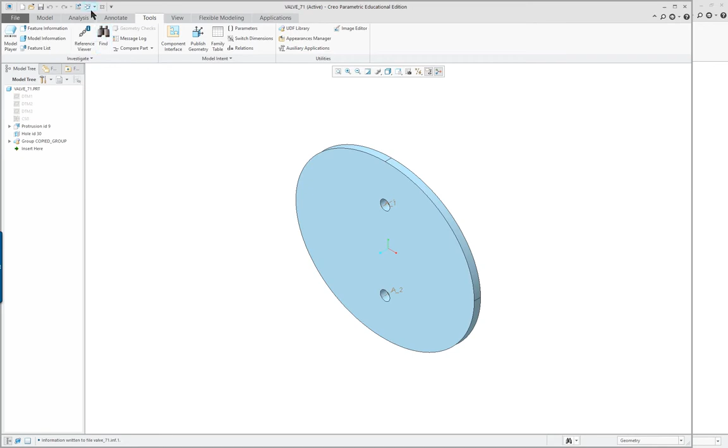One of the things we should do is at least check the units. It doesn't make any difference which of these we open. We could go over to Tools and Model Information, and it's in metric. So even though it says custom for the files, which I'm not sure why that's happening, it could just be part of the conversion process. These were created over 20 years ago.

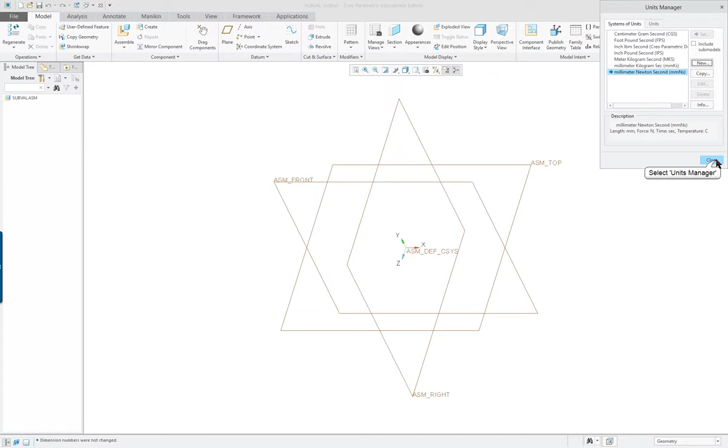So we're going to start off by selecting our units, and we're going to select change, millimeters, set, interpret, okay, and close. We have to do this when we do the assembly too. This is the sub-assembly.

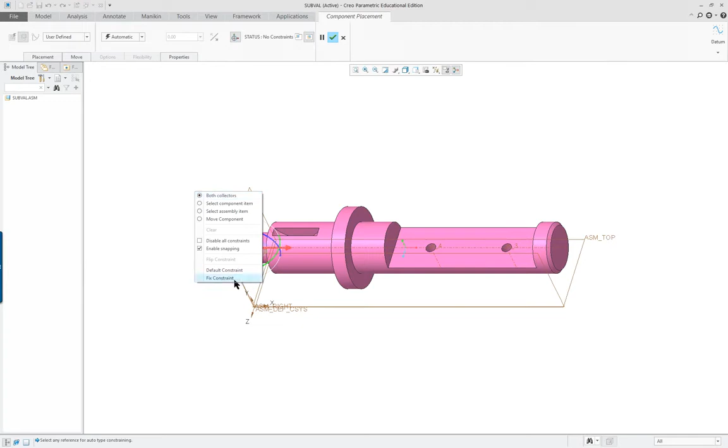So the first component to bring in would be the shaft. And the preview of the shaft is almost the same color as what I gave the shaft when I created it.

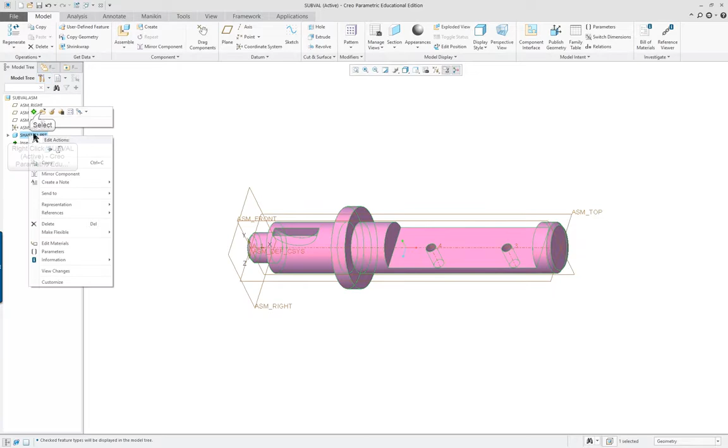So what I'd like to do first is view everything in our model tree. Let's open this up - it's always easier to do it here. View, and go into our appearances and just change the color.

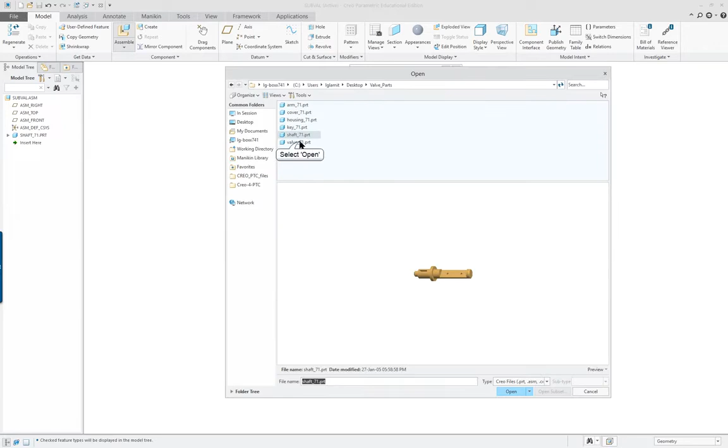Close it, and now we'll assemble our second component. The second one is the valve plate, and we're going to pick on a surface, another surface, and it's not going to be normal - we want it to be coincident.

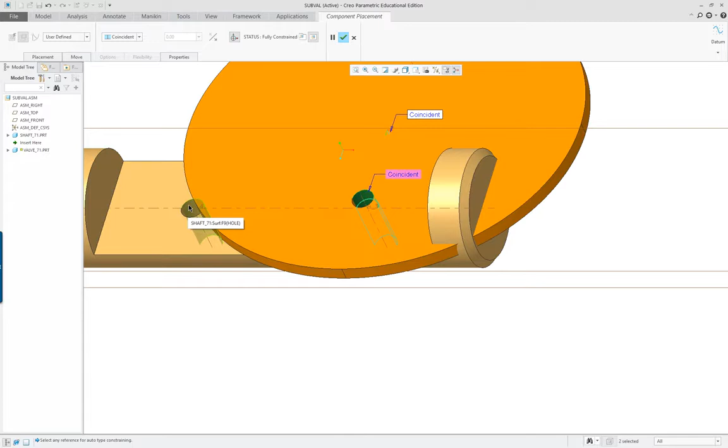And then we're going to select one of the holes, the other hole, and continue on. Right mouse button, new constraint, and select - you can select the axes too, that's a valid selection. Let's take a look at the placement, and it says it's fully constrained.

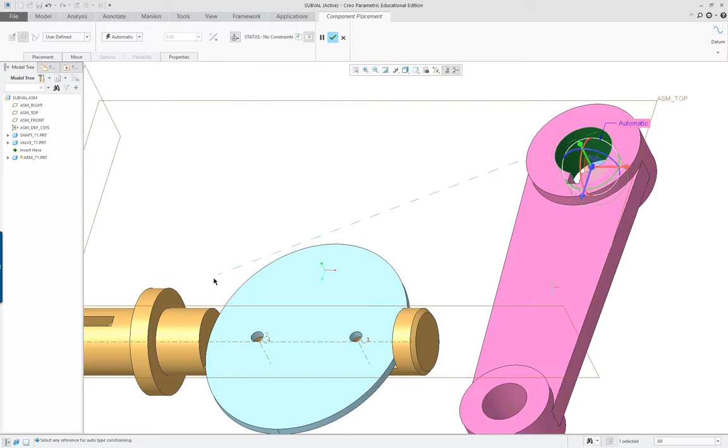All right, so the next one is going to be the arm. Assemble. We'll select the large hole here and the shaft at this end. I can drag this - I want to see it on the same side. Now my second set, I'm going to select here

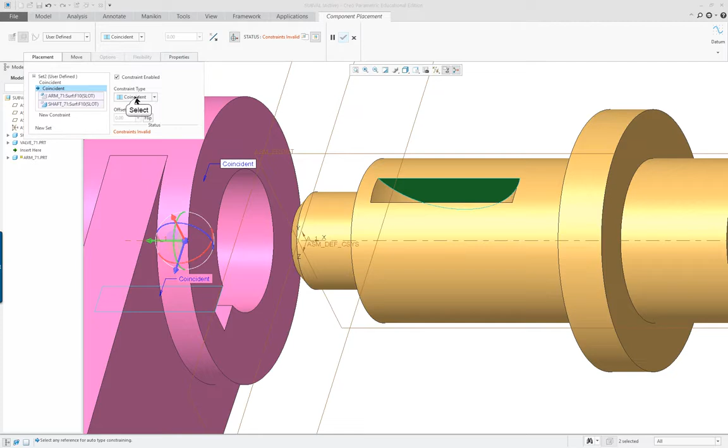on the key seat and right mouse button until I get this one, and this one says normal. So let's try coincident - it doesn't like it. Let's try parallel, and then the flip. Okay.

And the last one, we'll add one more constraint, and we'll select here and here. And we do want to make that a distance and back it off a certain amount.

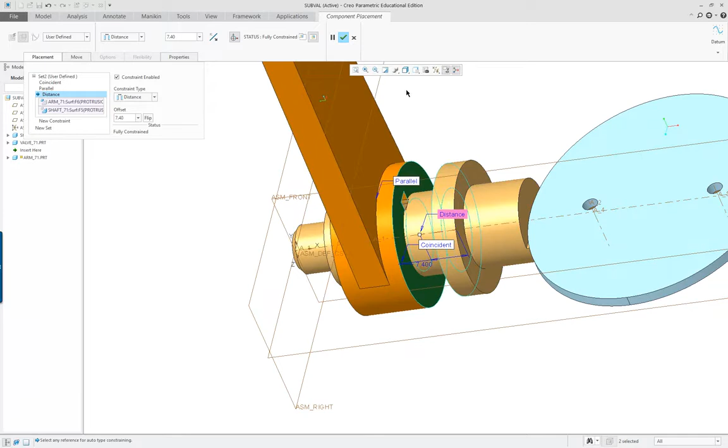Now what I'm going to do is go into my front view and hidden line, turn off the datum feature so we can see it a little bit better. And you can see the key seat here, and I'm just going to drag it a little bit so it's approximately correct.

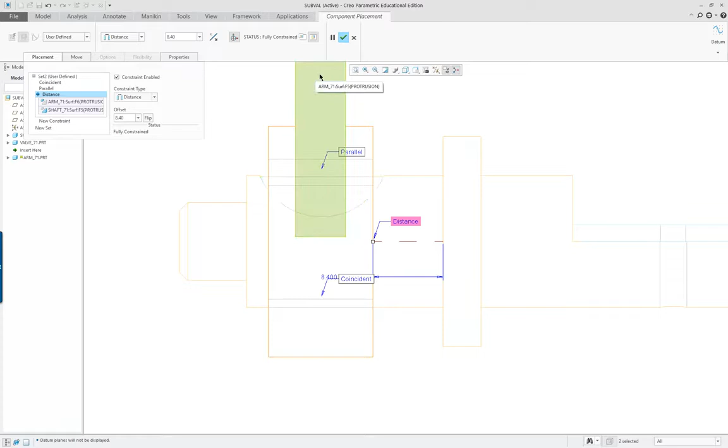Check. Standard orientation - we're going to go back over to our shading with edges so we can see everything. Okay, so the subassembly is completed.

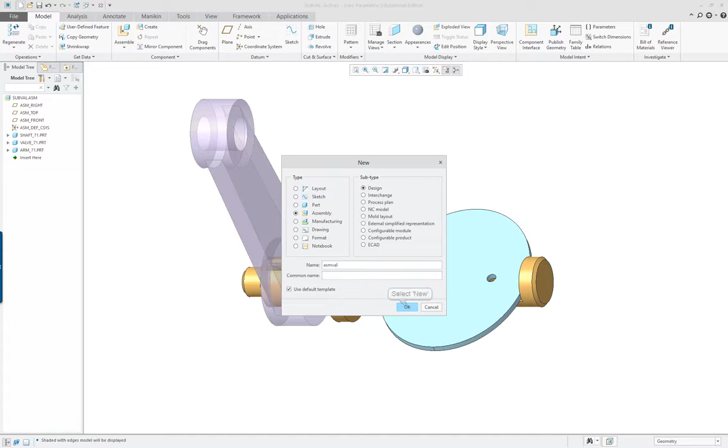So I'm going to start a new assembly, and I'm going to make sure in the very beginning I go and prepare it by having my units set correctly.

And we'll turn these all on. Again, unfortunately, you still have to go back and turn on the filters. No, they're okay. All right, good.

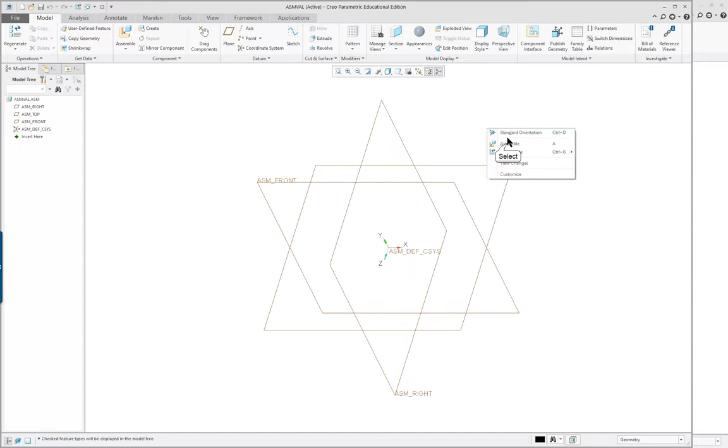All right, so we want to bring that other component in there. So assemble. It is in session. And we're going to put it at the default constraint again, like so. No, let's see, I'm doing this wrong. I'm gonna delete that one.

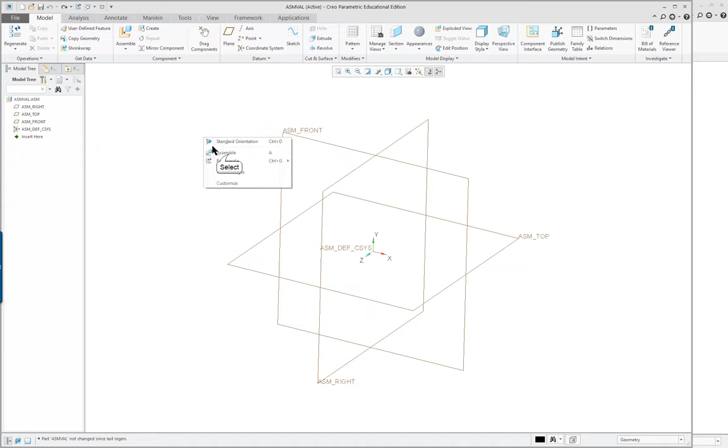We don't want to. We want to bring in our housing first. So assemble. And that one we want to have at our default, like so. And I'll shut off all of this for now.

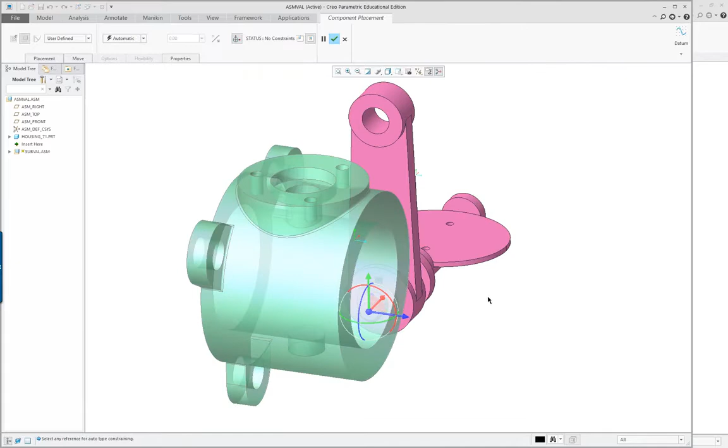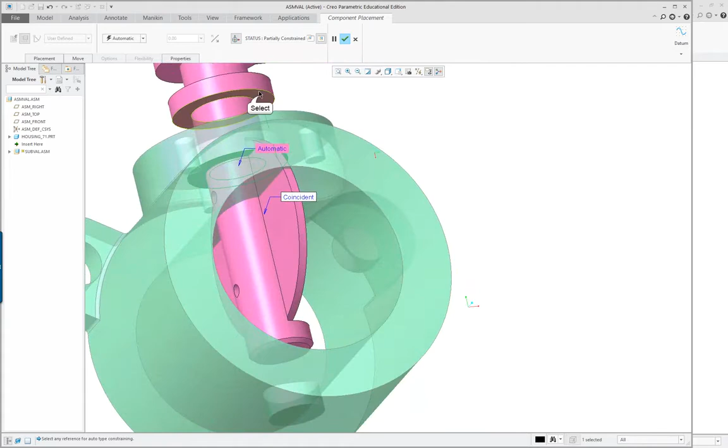Now, right mouse button, assemble. In session, we have our subassembly. And I'm going to select the shaft here and the hole. I'm going to go drag it to the other end, partly at least. And I'm going to go ahead in my second set of constraints. I'm going to use this counter bore hole here and the flange on the bottom. And that's coincident.

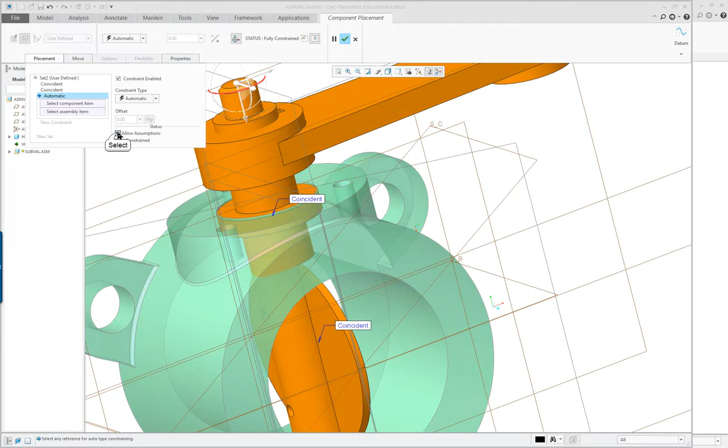And I think we're going to turn on the datum planes and we're going to add one more constraint. We have allow assumptions on. We could turn this off. And we need to pick a couple of planes so that we can revolve this if we want.

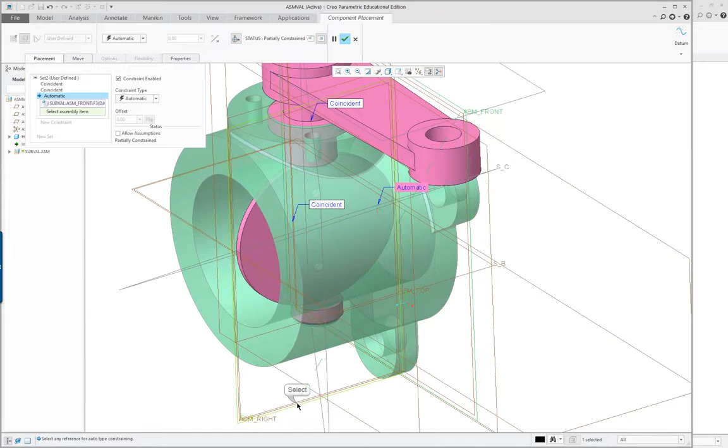So I'm going to select the subassembly datum plane and the datum plane that runs 90 degrees to it. And it says normal, but we want to change that to angle. And that gives us a chance to change this to anything that we want.

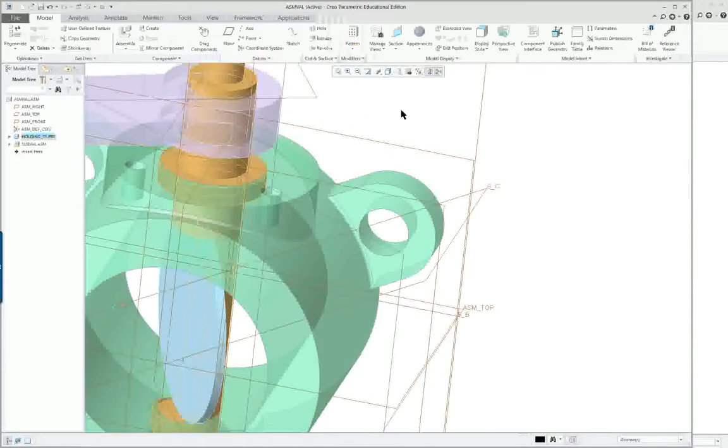And we can keep it like that. We can put it back. We can alter it when we're in the assembly. We don't have to be in the edit definition of it.

Okay, we're still missing the plate, or the cover, I should say. And I'm going to select the hole.

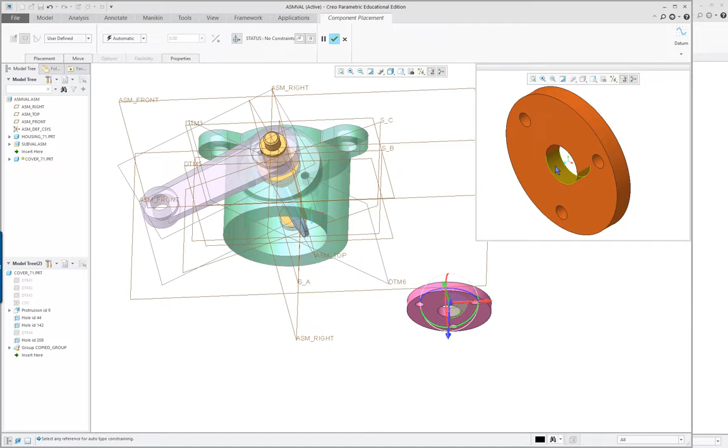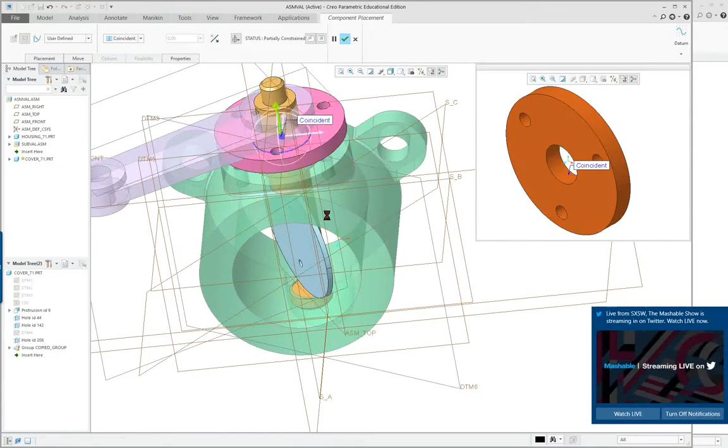I'll open another little view of it, little window. And I'm going to select the hole and the shaft. And then I'm going to move this. That's probably the best thing to do.

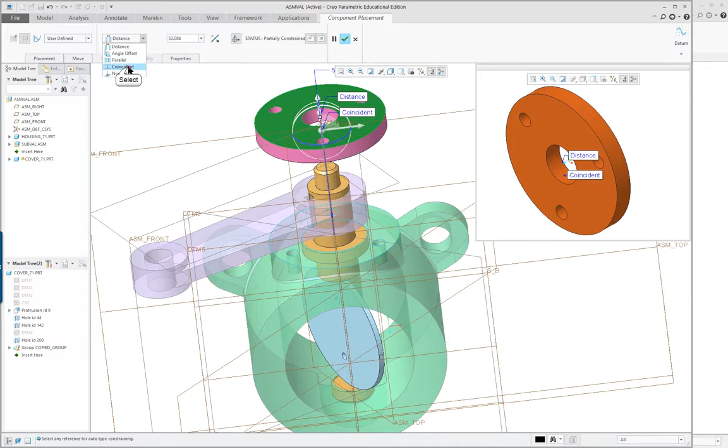Like so. And we'll select a couple more surfaces, this one here and the one on the bottom or the top. It doesn't make any difference. If you get the wrong, not the wrong one, but you can always flip it. And this is going to be coincident. You can see it's embedded in the model.

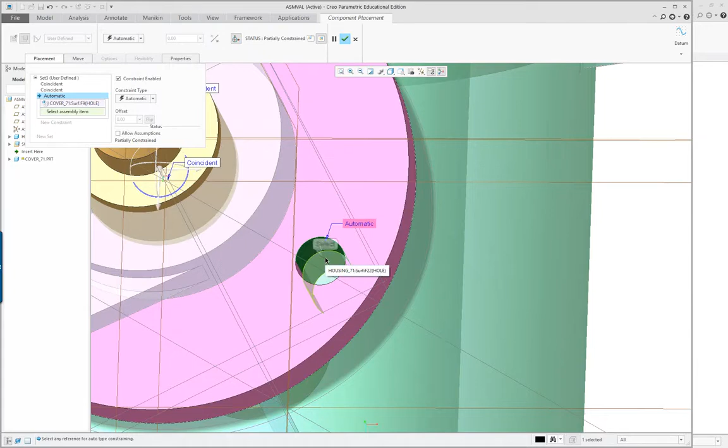So here's where we do want to flip it, like so. And many times it's smart enough to know where it's supposed to go, but we do need to add another constraint here, and that's for the hole. And we're done. All right.

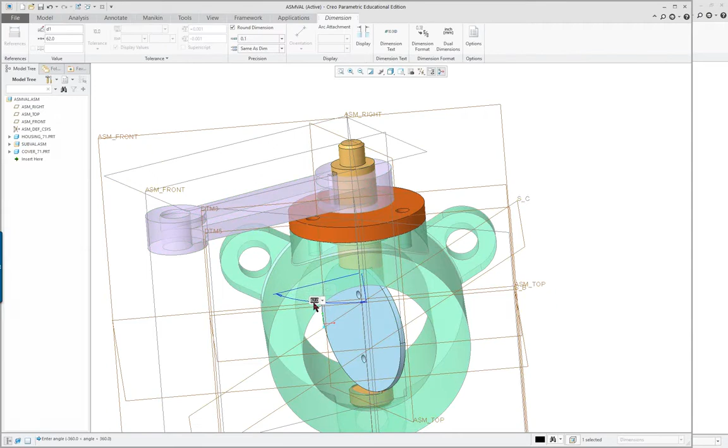Now I'm going to go back over to the subassembly and click on the edit so we can see the degrees. And I'm going to go back to 90, see what it looks like. I have to regenerate it.

Yeah, it's fully open. Okay, now let's design a component in the assembly. I'm going to click create here, and this is going to be the key. Now, normally you wouldn't create a key like this. You just take one out of the catalog and use it.

We're going to locate default datums, align coordinate system to coordinate system, okay. And I'm going to select the assembly. Let's see, do I want to set the assembly, or how about the subassembly coordinate system? I think I will create it with the subassembly.

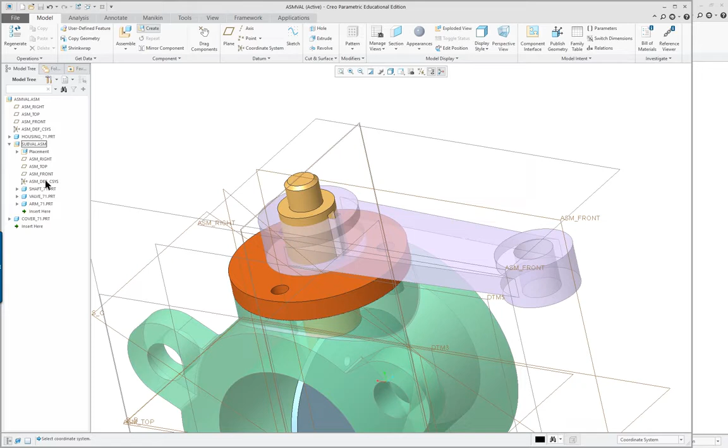Everything gets grayed out, it's inactive. And you can see where the datum planes are here. And we're going to create an extrusion using that datum plane.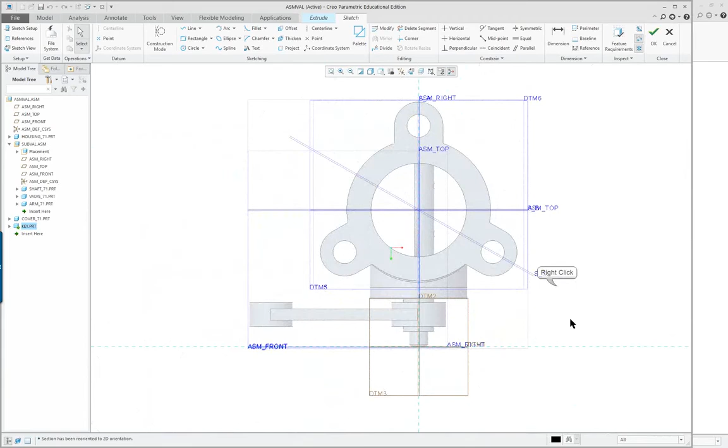And we'll go into the 2D and maybe reorient a little bit. There we go. Zoom up, turn off the planes, and go in and select hidden line.

So this is the key seat in the shaft, and this is the key seat in the arm. So we want those as references. Right mouse button, references, select both of those. All these other ones are not necessary.

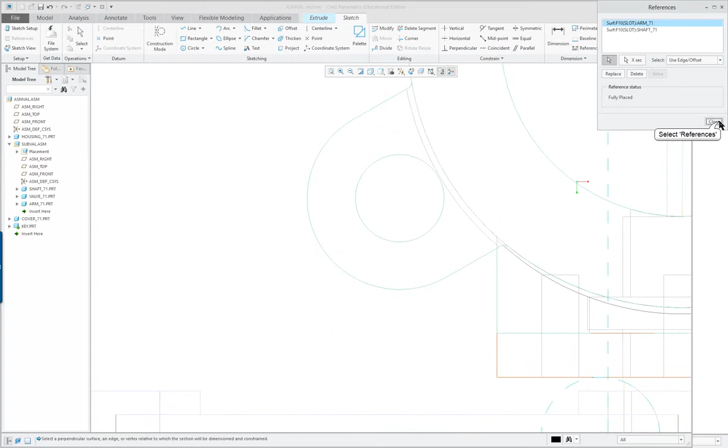Unfortunately, it turned it when I did that, but that's not a big deal. I can reorient the view if I wish, which I should do, just so that you can see it similar to what's in the book. So let's see if we pick this, what will happen. Okay, it's kind of interesting.

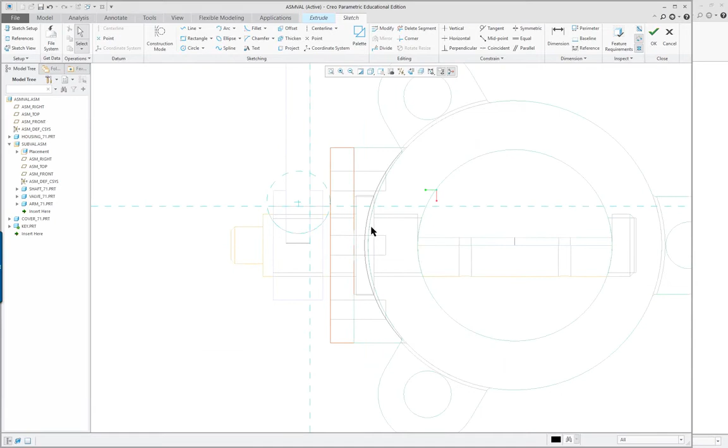So whatever you pick for reorientation, put a reference there, right down here, which I really don't need one. So we're going to go to arc and center ends, center, and we're going to stay within the confines of the shaft. So we're just going to go down here, and when it lines up across, you'll see the little dashed line, dotted line. So there's my arc.

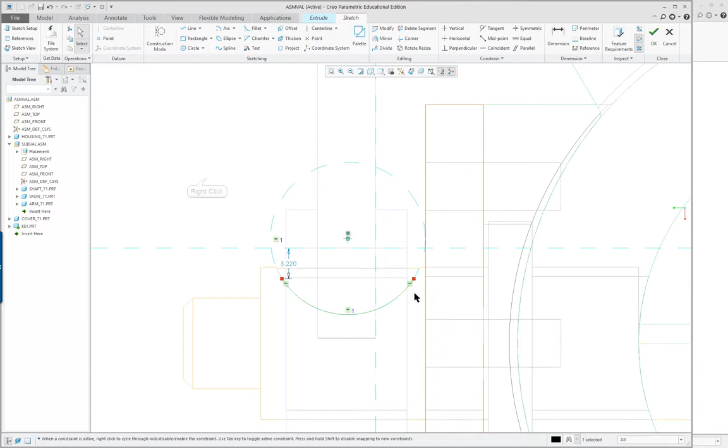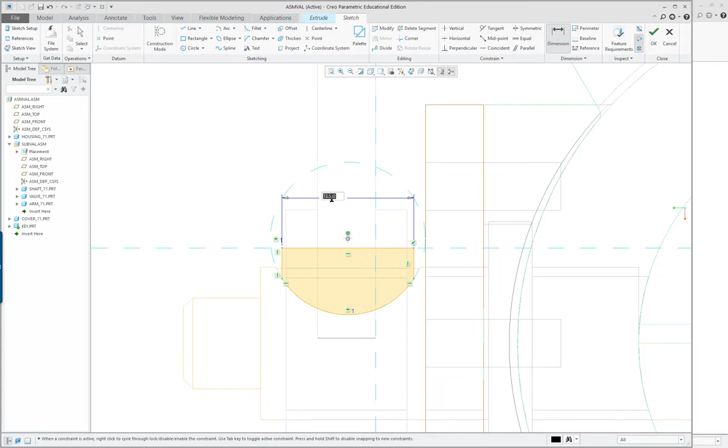I want to have a line coming up from there, going across. Again, watch your little constraints. How many dimensions should I have? I should only have one. Now the dimension I might prefer would be this one right here, like so. And let's make that 14.

I'm going to turn the model. Check. And I want to go up to a surface.

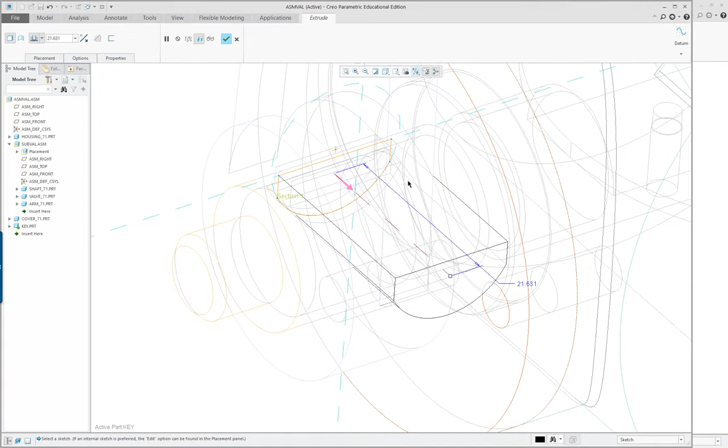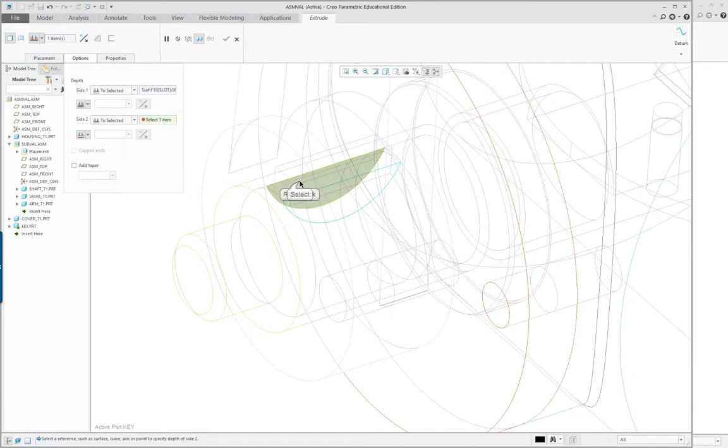I'm going to select two and right mouse button until I get the key seat on one side. Then under options here, to the other side, To Selected, to the key seat on the other side. Like so.

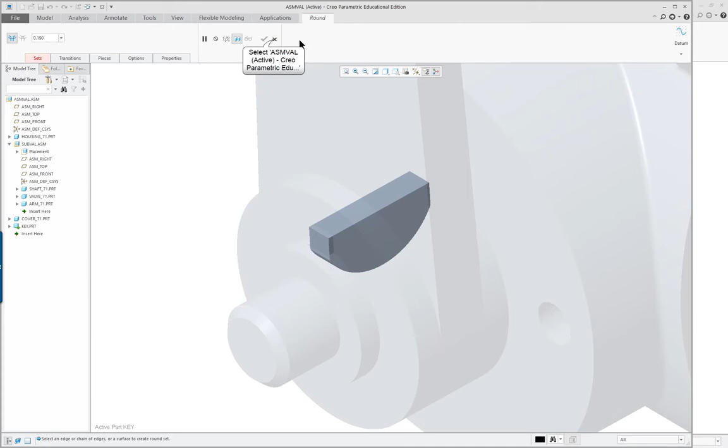And we'll go to shading and we'll see our part. It is active, so if I wanted to, I could do something right here. Let's say I wanted to put a round, auto round it. So now it's got a little tiny round on it.

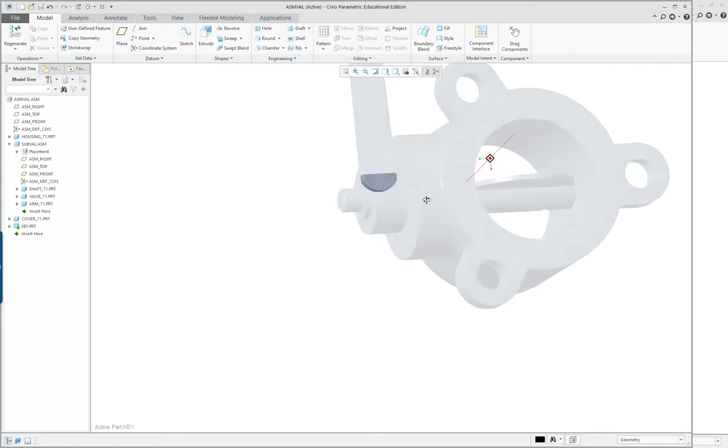So that's creating a component in the assembly mode called top-down design. All the references were external except for the one dimension. So basically it's being determined by the key seat that it's referencing on both sides, and also in the arc and in the arm part. So the arc is in the shaft, and the arm is controlling it on the other end.

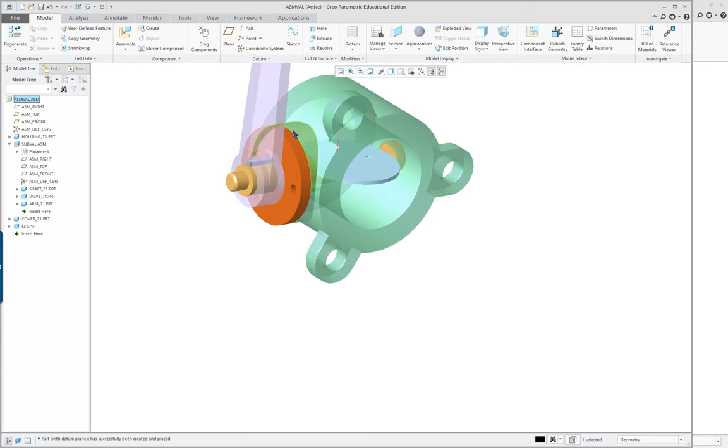So let's activate the assembly so we can see it all. And let's go and do a little analysis and do an interference.

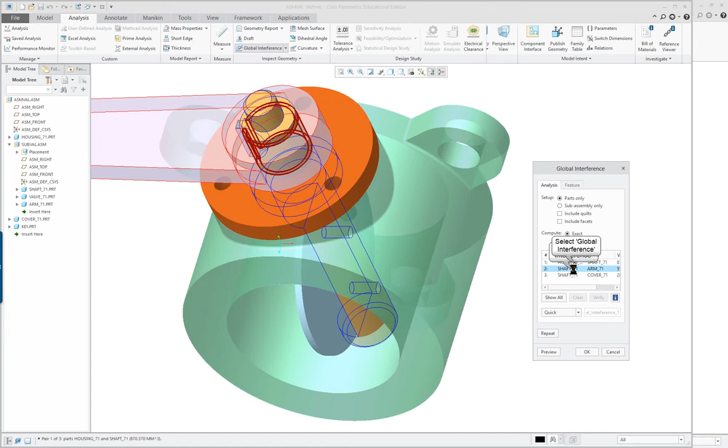So we've got some interferences with the shaft and pretty much everything. So basically something's wrong, maybe with the shaft. Let's assume that. The shaft is showing up 3 separate places here.

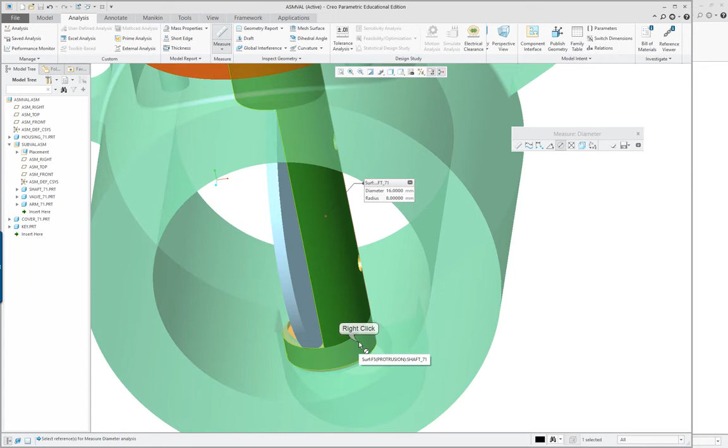So let's just do some measuring. We're going to measure the diameter. We'll start off with the shaft. It's 16. The hole is 14. The hole here is 14. 14. So basically the shaft is too big.

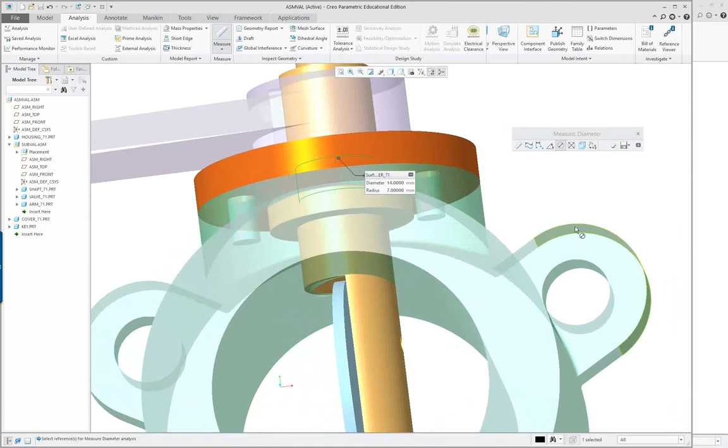So let's just go simply and change it and see what happens. Go back to model. I'm going to activate it. And I think what I'll do is I'll just go and click on the feature, edit the definition, and go into my internal.

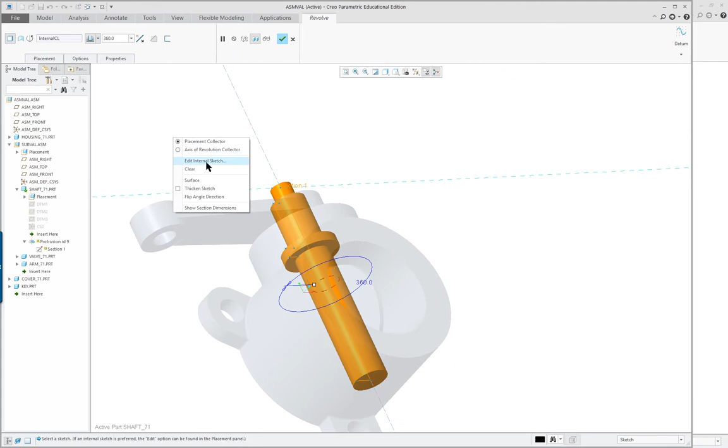Well, before I do that, let's just double click on it and see what happens. Or single click and show dimension. So I just got one dimension. That's for the distance there.

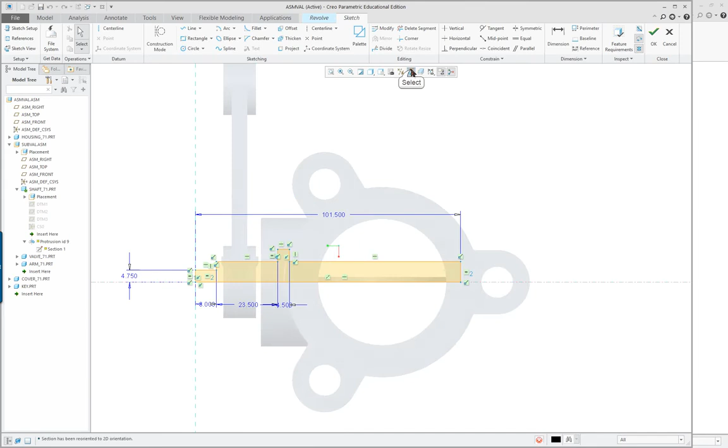So we'll go back over here, edit the internal sketch, and take a look at that. Wow, that's about the worst design thing I've ever seen. Somebody actually has one radius in here, and their constraints are such that it's actually only one dimension, and everything else is using constraints except for the distances here. So something's drastically wrong because we don't have any diameters.

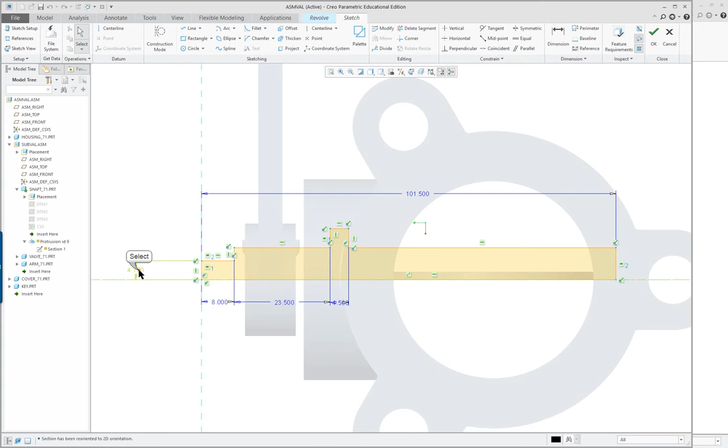So, right mouse button, dimension, select the center line and the center line, middle mouse button, and we'll delete that. Okay. Now, we could go in here, we see the constraint equal. We could get rid of those, equal, equal, equal.

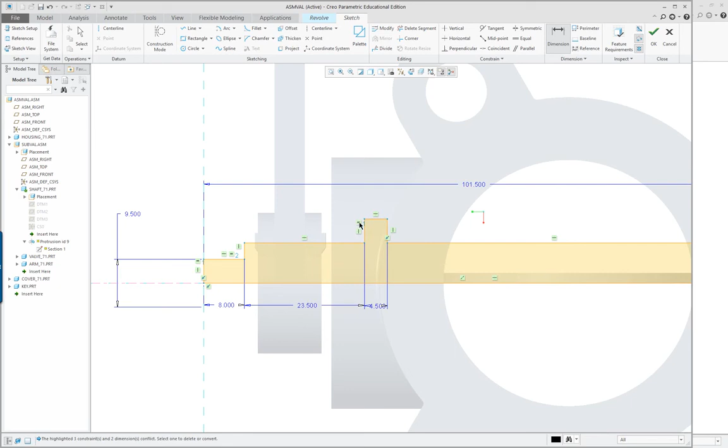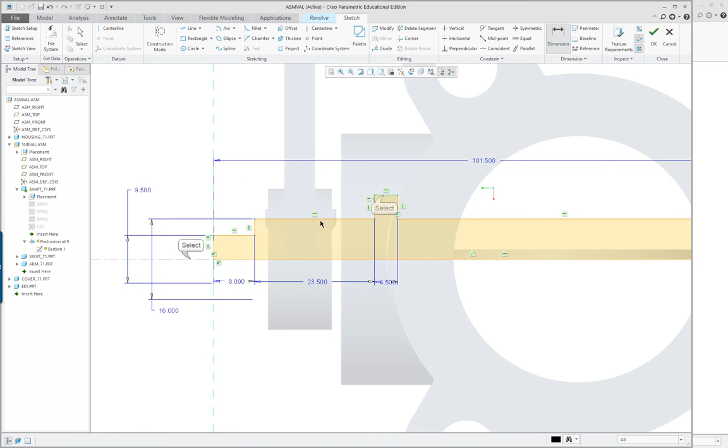Can click on it. Let's do this. Let's continue with center line, line, center line, 16. All right, and we have one more here. It's still active, so we can go line, center line, line. Either direction is okay, in other words. And we have our dimensions.

So as I recall, this one's supposed to be 14. And I know these are stacked up. You can redimension them if you wish. I'll leave them like they are right now.

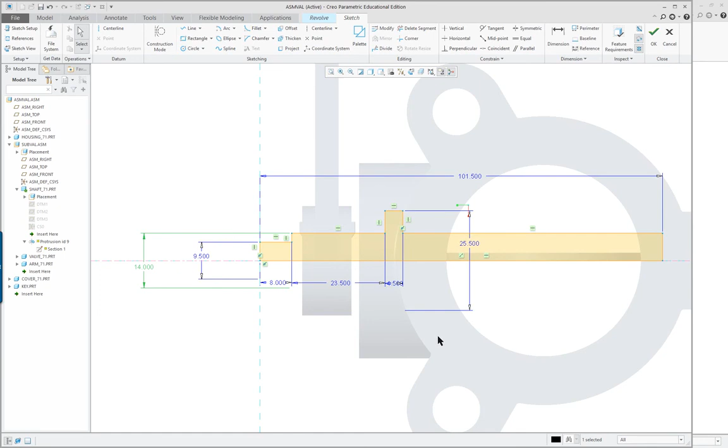Clean them up just a tiny bit. All right, so now we have all our diameter dimensions, which we would need under normal circumstances, not radiuses. Check.

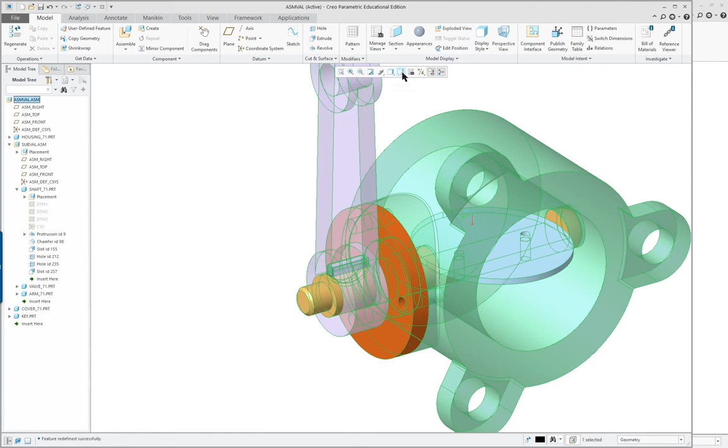All right, so let's activate the assembly and go into my view. Let's just do it from here. I'm going to move it around a little bit. And now let's try the global interference.

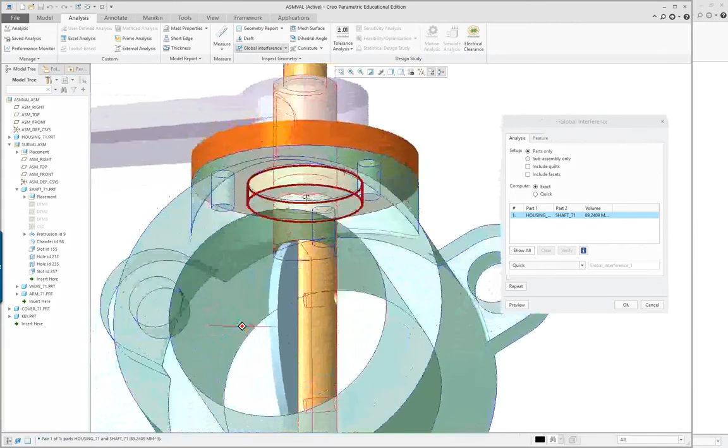So we still have one place. Oh, because we never changed that. So this, where the shaft flange here goes into the housing, it's still interfering. So as part of the project, go in and find out what those two dimensions are and alter the one that you want to alter. You can change the one in the housing, or you could change the other one. It's your choice.

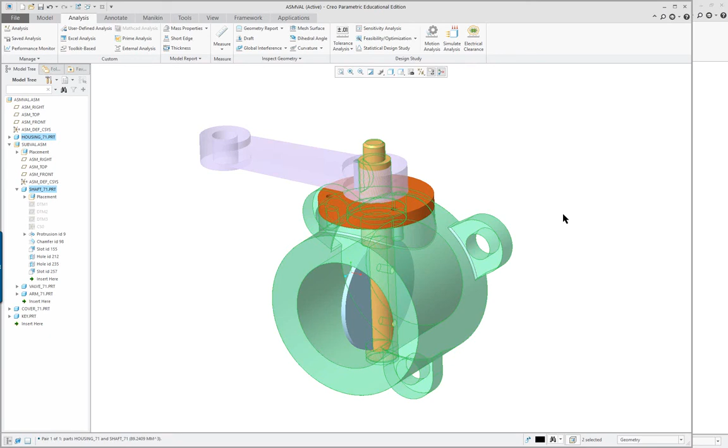Okay, and that concludes lesson 20. I hope you will watch this at least 2 or 3 times before you do the actual modeling. And you can actually watch the video on another device, like your iPad or a laptop, while you're doing the work.